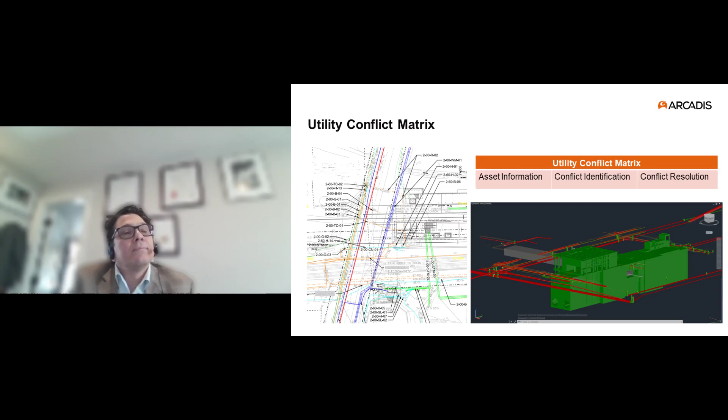We pulled everything together from different software because some team members work in Revit, some work in Civil 3D, others in MicroStation, and a lot of records were in PDF format. So we needed some data ninja who could digitize and export all the information into one single 3D model software. And now we use modeling software that runs in the background and can be accessed through a web browser. And we have a video we'd like to show to the audience.

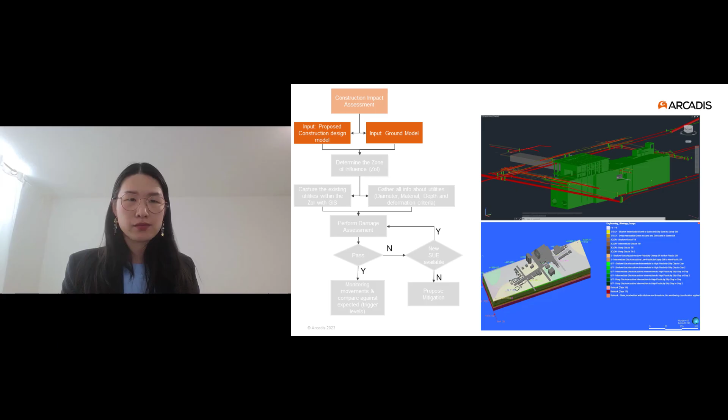So the video we just saw is a model that we built using all the borehole data we collected. It gives a clear picture of everything underground for the project, and eventually becomes a digital twin of the site's underground condition. We worked closely with our CJV partners. CJV stands for Construction Joint Venture. It's a design build project.

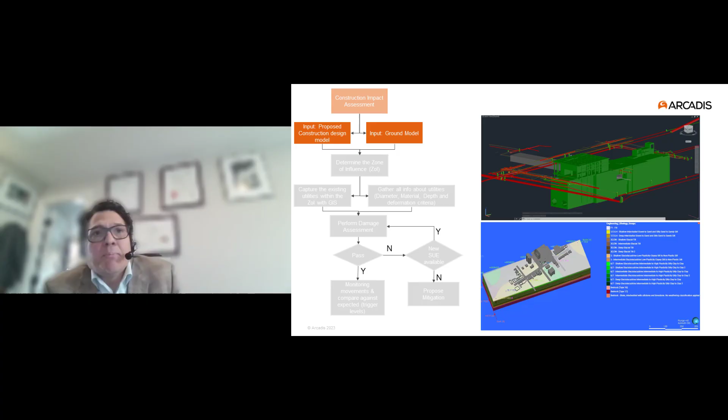And to figure out the phasing, the staging of construction of the proposed structures, there's a name for this. They call it a 4D model because it includes visuals on time. So you have the 3D visuals. When are these, for example, secant piles coming in, are we gonna do the west side first and then the east side, and do we need to move utilities? So all of those 4D models allow us to look at timing as well as conflicts. And this approach helped us see the full picture and identify where the potential impacts may come from. We'll go to the next slide.

We then use a GIS-based tool to identify and extract every single utility within the zone of influence. We download all available data on them, like material, diameter, depth, anything we can get from the records. But records are never enough, so we proactively contact each utility owner directly to obtain their most critical piece of information, including their performance criteria. For example, what is the maximum strain their asset can handle, and what is the allowable joint rotation. This tells us not just where the utilities are, but also how fragile they are.

And in our case, some utility owners were reluctant or didn't actually know their deformation limits. So in a few instances, the utility company took the initiative to do their own calculation and share the results with us. And that's a great example of learning from each other and working together as a team to protect important assets.

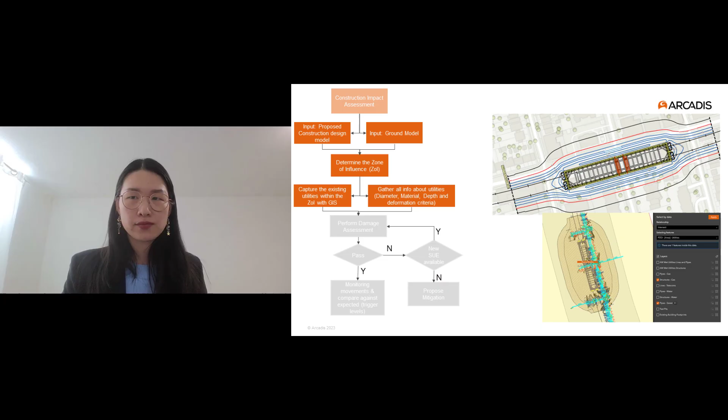And one of the things that we learned, and we have to keep in mind when we do transit projects that require tunneling or open excavations, is a cumulative impact. A cumulative impact may happen even before we start the project. For example, if there's a condo building being built here, a lot of the times these condo buildings have underground parking, and they need to do huge excavations.

So sometimes it's really difficult to assess how much the utility moved when those condos were built, or how much the utility moved after the transit project came in and then a new condo came and built beside it. So just keep your eye, for those of you working in municipalities, that this is also a risk, the cumulative impact of multiple developments in that area. Let's go to the next slide.

So this is when we get to work quite a bit. You can see the flow chart moving a little bit here, right? Step 3 is really our damage assessment, where we do a detailed number-based analysis. We take the predicted ground movement from the models and calculate or transfer it to a specific force it will exert on each utility. They include, like Panchan said, tensile strain, compressive strain, joint pull out, and rotation.

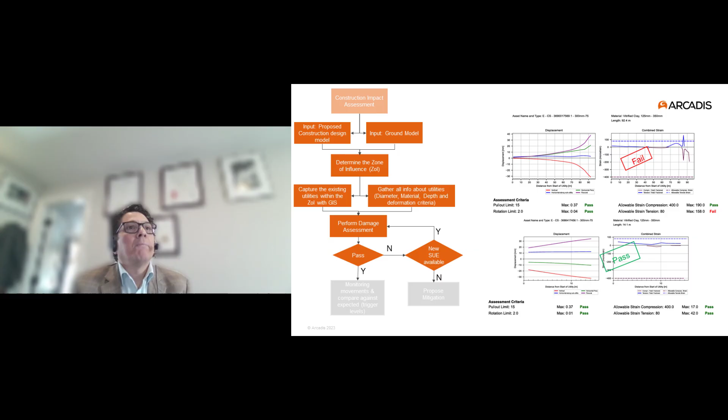So just want to note here that this is not just a one-time exercise. We rerun the model whenever there are design changes, shifting the zone of influence, and most importantly, when we get new higher quality data from the SUE survey, we will implement that into the modeling as well to refine our models to produce more precise analysis.

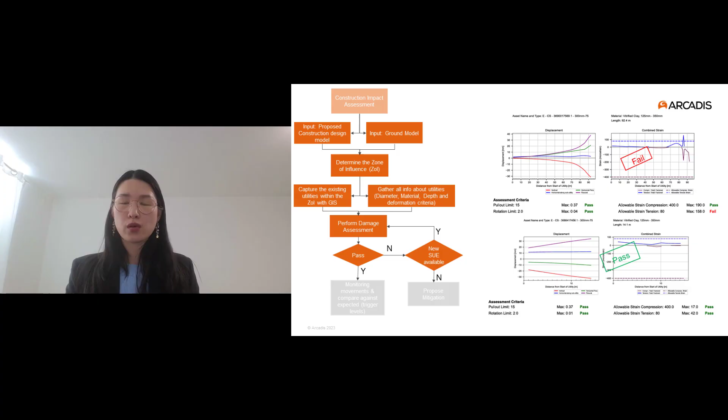Thank you. If a utility passes the test, the job is not over. Like I said, we set up a monitoring plan to check if our predictions match what is happening on site. We have the trigger levels. An amber alert, for example, is 70% of the predicted movement. And a red alert is 90%, when it's getting close to that movement. This gives us an early warning and tells us when to follow our response plan to prevent any problems.

In this image, it's hard to see, but you could see a bunch of monitoring points that we have determined are needed in relation to the proposed facility. And you could also see the contour lines here that show the zone of influence.

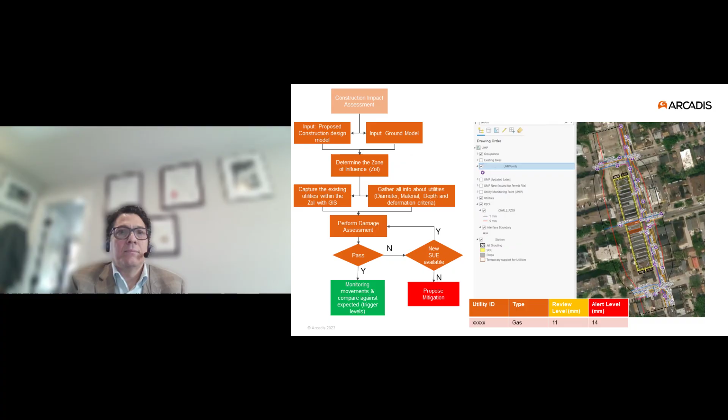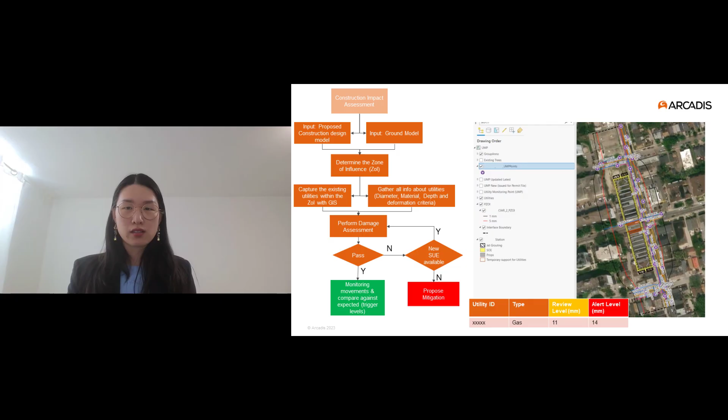If a utility fails, we look at different ways to fix the problem, and the solution depends on the issue. It could be jet grouting to make the ground more stable. For example, here in the map, you could see dark hatches, which represent the area that we determine will need jet grouting. Or we could add structural support to the utility, or if needed, we reroute the utility completely. So we choose the best option based on the costs, risk, and how much it will impact the community.

Our approach to keep the stakeholders confident and our projects on track comes down to 4 pillars. First is proactive and transparent communication. We use a clear communication plan to give regular updates, turning the stakeholders from worried bystanders into informed partners.

In one of the locations, our 3D model flagged that the support of excavation wall was only 0.3 meter away from a huge brand new chamber. As we mentioned earlier, we worried about old infrastructure, but sometimes the fresh stuff could throw a curveball to us as well. And of course, after we discovered that, we didn't keep it quiet. We brought it up right away in our regular coordination meeting with the utility owner. We shared our concerns, listened, and understood their requirements.

And that follows the next pillar, smart design changes. By identifying these conflicts early in the design phase, we can often make small adjustments to our design. For the chamber that Ponchan spotted, what we did is we shifted the SOE wall, the support of excavation wall, to keep a safe distance. This is the most cost-effective risk mitigation, to change the design, preventing disruptions before they happen.

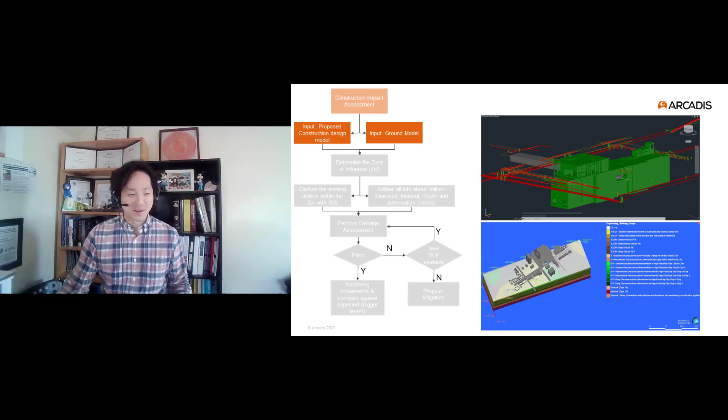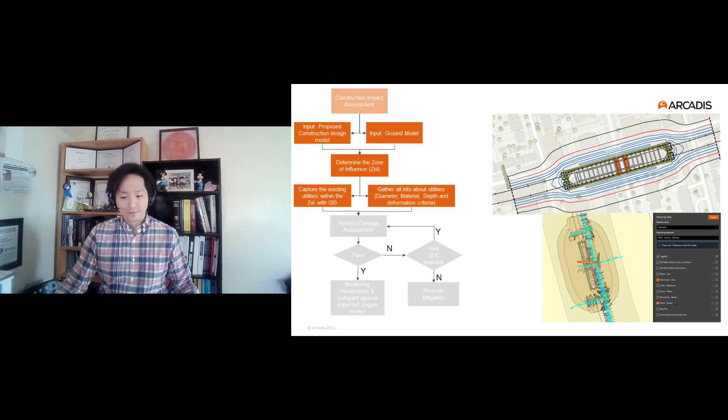Okay, the next question, I think that's an interesting one. Is your zone of influence only horizontal or including a vertical zone of influence? Yeah, the zone of influence is both. It's mostly vertical, but it's also horizontal. So it's a 3D generated model as well. You take the model from Plaxis, and then you're able to export it. That's where we have a lot of data gurus out there who are able to transfer it. And nowadays, we have a common platform where we put everything.

Is it a CAD file? Is it even a PDF? Is it something else? And then we bring it into a common ground. So yes, the zone of influence is a 3D model. Thank you for clarifying that.

Next question is, have you participated in any projects where water pipes were CIPP lined to increase strength before a project has started? I've been in projects where pipes were CIPP lined. That's a solution. You know when we spoke about settlement, right? We said the model predicts a settlement of, say, 10 millimeters or 9 millimeters, or maybe it's 11. It goes beyond. So what we've done is, okay, that's what the model says. It's theoretical, fine. Let's put a liner on this pipe, and then we go back to the model and say, we're going to put a liner here, and then it'll improve the model.

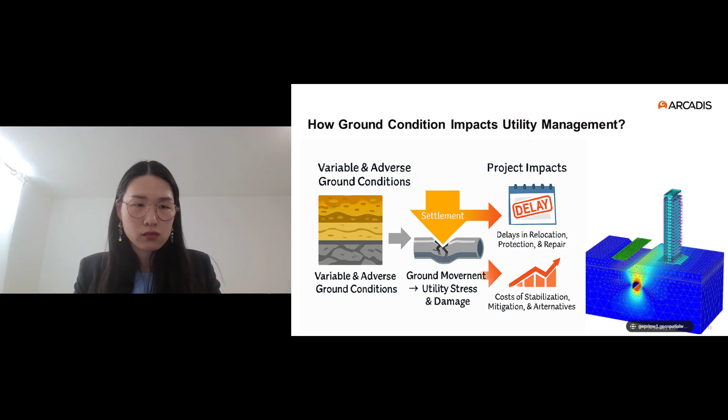And I also want to just add on Richard's answer. Remember, we also mentioned that we communicate regularly with utility owners. So that's some information that they could give to us if we encounter anything. And we also share the results we have and our assumptions with the utility owner as well. If they have any concerns, they always get back to us, and we'll take their comments into account. Sounds good. Sometimes we look into all the books for hours and hours, but sometimes one phone call, we ask people, then we can get information as well.

All right, the next question. Would you say this method of using AI to find conflicts is better than the clash detection on MicroStation? Oh, that's a great question. So no, nothing is better. All tools are used. And by the way, some clients want to see the clash detection output, right? So we use both.

Here's what happens. We create the conflict matrix ahead of time before the clash detection, because we may not have all the models. The architects will take a long time to build the models. So we need to start going, and utilities go first. Okay, that's my motto. Utilities go first. Every project is a utility project kind of thing.

So what happens is we find it with AI, we code it, then we run this clash detection, and it may go away. If we actually have the 3D model, it may go away later. At the beginning, we may log it as a conflict using this method, and then later on, once the models get to 60 to 90%, then we use the clash detection in MicroStation. There's no way around it, in my point of view. Thank you.

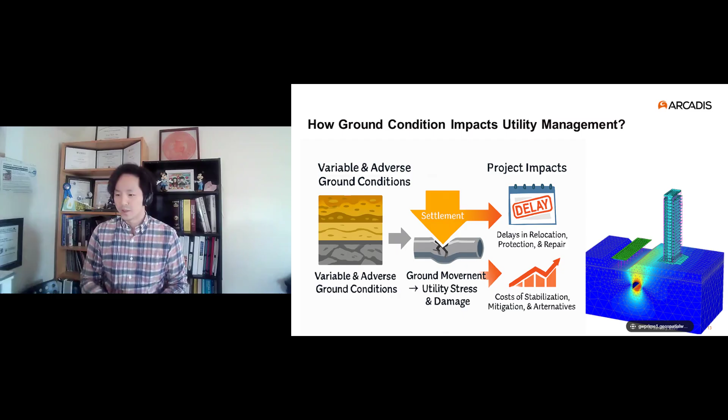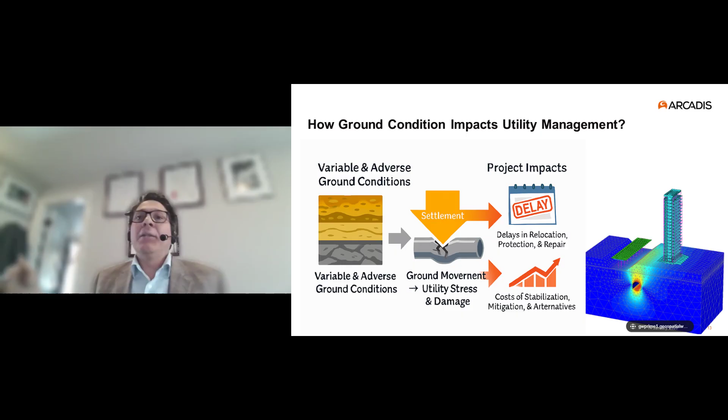Thank you. That's a good question. It's so much data. So what we do is we go through the municipality, for example, and we dig up every single project they've done in the area. So it's third party. We use a lot of third party. It could be a developer that did this, or it could be some road work that they did. So they have a log of all these boreholes in the area. But then we also have to validate this with our own borehole plan. So we work with the client and say, okay, we need more boreholes to ensure that the data is correct.

So in a project like the ones we're discussing here, there's thousands of boreholes. That's part of what Panchan said, that we need to find a lot of data. So we go to municipalities. Sometimes we talk to developers in the area because we know developers are coming along and they want the benefit of the transit system for their stuff. So we tell them, okay, do you have any boreholes in the area?

And we get them. We go to old approved projects. We get them. We go from the EA, way back in the EA time; some EAs go back 20, 25 years. We find borehole data and we put them all in one single plan, as much as we can. And that's how we build the model.

Thank you for your answer. A lot of stakeholders, that's why Panchan said you need many people, because you need that person going, hey, where is that? Like, did you guys do a project here? Did you guys do a project there? And then we build a database. That's right. The real power is the data, but data comes from people. That's the value of communication.